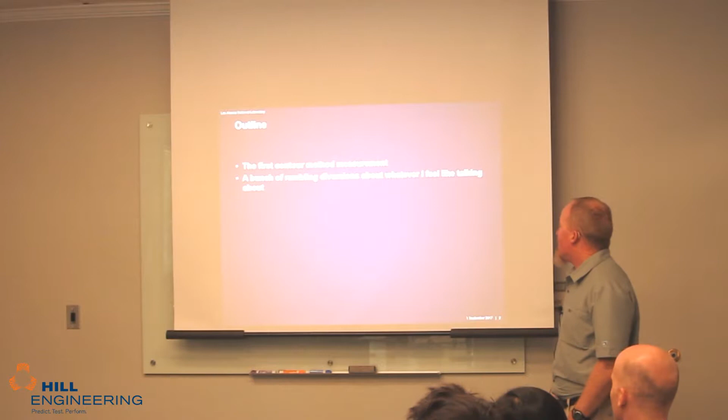When I talked to Adrian about what to talk about here, we both had the same idea to talk about the history of the contour method. So that's kind of what I'm going to do. And you see the title there, the first and nearly last contour method measurement. So really it almost didn't happen, and I'll explain to you why. And I'm going to use this opportunity to tell some parts of the story I've never told before. I figure you guys are an audience that might appreciate it. So even some of the stuff even Mike hasn't heard before. Hopefully it's entertaining. My outline, I'm going to talk about the first contour measurement, and I'm going to do rambling diversions on whatever I feel like. I figure you guys are a captive audience. So I got a few things I'll talk about.

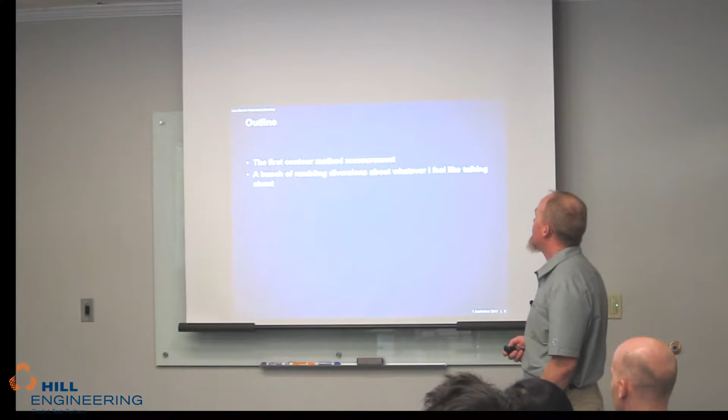First, the backstory. I got my PhD in ME from Berkeley in '94. And I did do my dissertation on residual stress measurement. Worked with Iain Finnie, who was my advisor, and Weili Cheng. You guys have probably seen Cheng and Finnie papers if you read that stuff. Weili was, I think, a postdoc for a while, then a researcher. Very brilliant guy, but very hard to get anything out of. I had a hard time learning the slitting method when I first learned it from Weili.

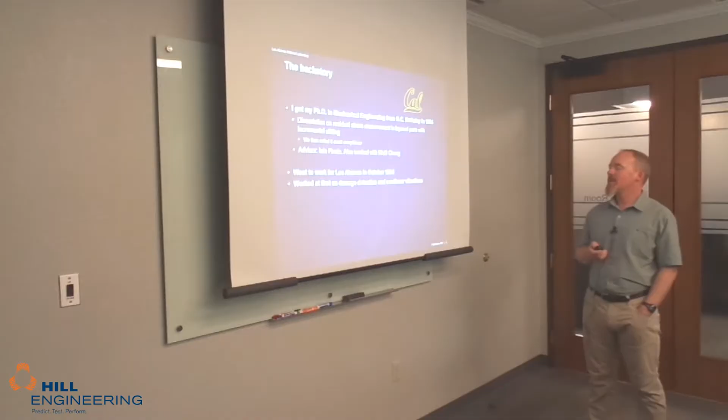Went to work for Los Alamos in '94, and the first year or more I worked mostly on damage detection with vibrations, looking for cracks in parts and things like that. Nonlinear vibrations mostly, mostly that was what I was working on. I got back to residual stress a little bit in '95. We had a CRADA at the lab - Cooperative Research and Development Agreement - with General Motors. And they were worried about distortions in their gears, case-hardened gears.

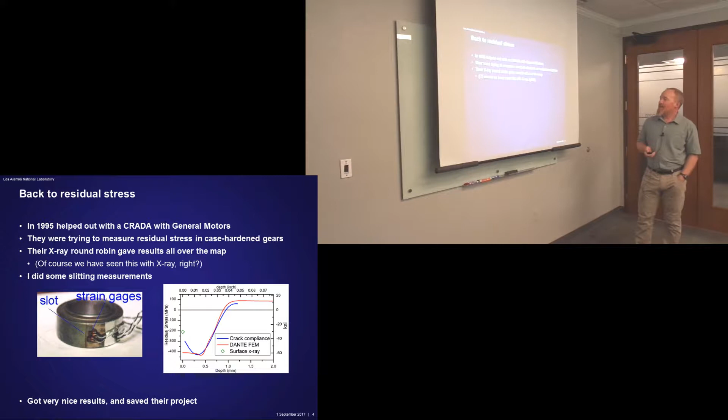And they were trying to measure that residual stress. They had a bunch of guys doing X-ray. And they took the parts, sent them around to a bunch of X-ray labs around the country, and got results all over the map. Now, Mike's not going to be surprised, you guys probably aren't either - we've seen that kind of stuff before with X-ray diffraction. They were quite worried, so they asked if I could measure the stress in this thing. Somebody remembered the talk I had given when I interviewed for the job.

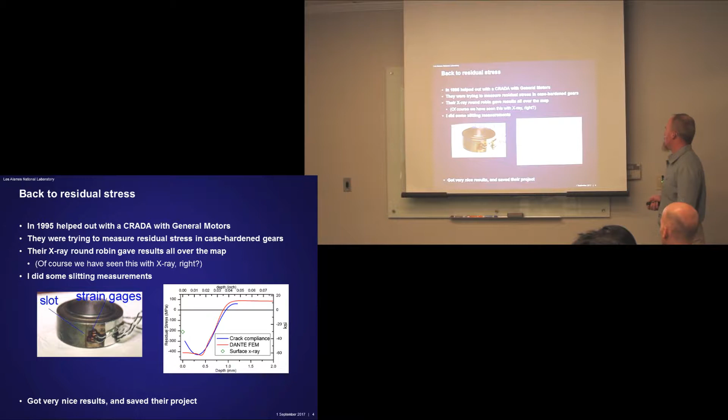So this is the gear blank. Put on some strain gauges. Did EDM slitting from the outside in through the case-hardened layer. And these are the results we got. The blue curve was the residual stress from that slitting measurement, compared with some FEM and a surface X-ray measurement. Got very nice results, and it really saved them on this project. They were really having a hard time getting believable results.

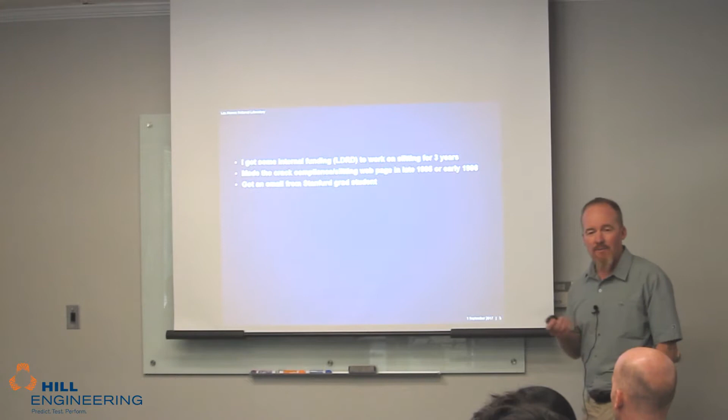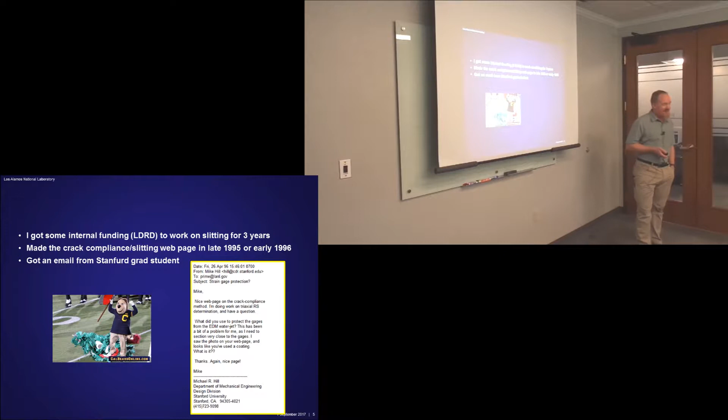And I got an email around then from a grad student from Stanford. I think I've got a picture of the email. How did that get in there? That's Oski stomping that pickle or whatever that Stanford mascot is. This is the email from Mike I got in April of '96. He had seen the web page and asked a question about waterproof coating on the strain gauges. That's how I first met Mike.

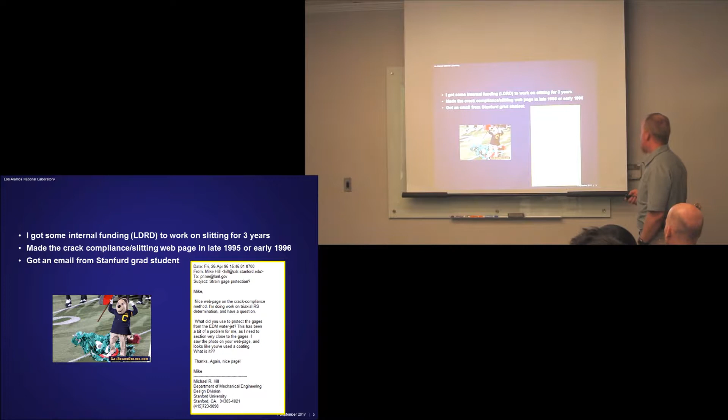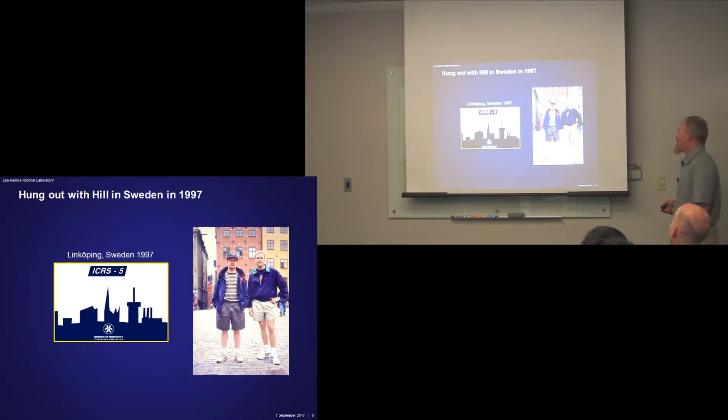I hung out with Mike in Sweden in 1997. The International Conference on Residual Stresses was in Linköping, Sweden in '97. And we roomed together and hung out in Stockholm. There's a picture - nice shorts, Mike. Yeah, had a real good time. And if you ever get the chance, these are great conferences. The International Residual Stress Conferences, I think they're fantastic. All kinds of people working on residual stress, doing great work.

As part of the LDRD, I did a literature review on the slitting method. I looked up all the references I could find, and as part of that, I found this conference paper from a guy working on railroads. You can see the title there—they did saw cuts and measured displacement on railroad rails.

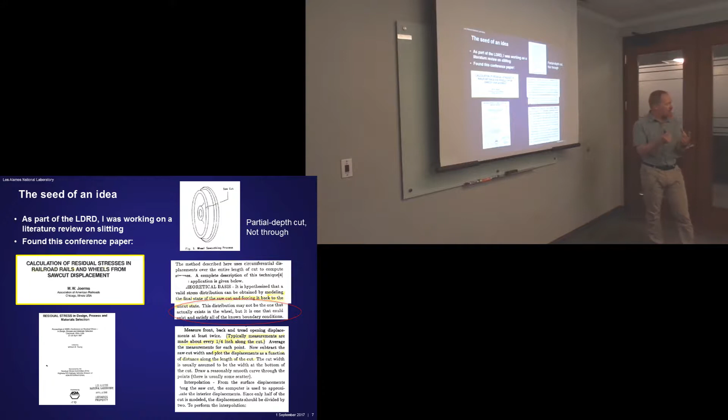Here's the wheel—actually the measurement was on a wheel. He did a saw cut from the outside radius in, so that's the edge of the saw cut. He made marks on the inner and outer, front surface and back surface of the wheel, measured how far apart they were, cut partway through, and measured how far they moved. Then he took those readings, interpolated them a bit, did a finite element model, and forced it back flat. He says it might be right, but he's not sure if that's the correct answer.

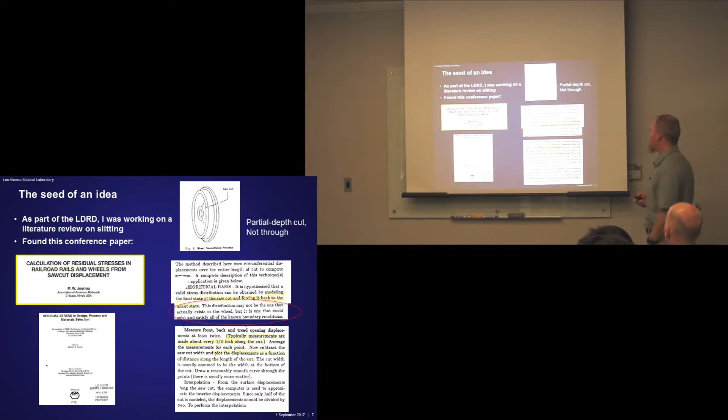I referenced this article in my Slitting Literature Review—it was a LANL report from '97, published a couple years later in Applied Mechanics Reviews. I didn't think much about it after reading that paper.

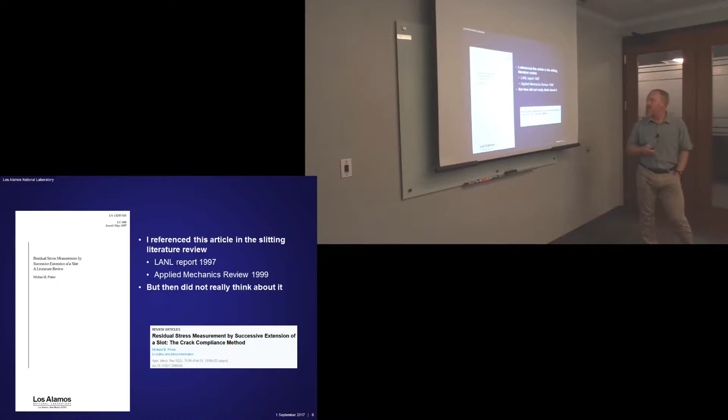I was writing a talk for a conference on the slitting method, and we often talk about how we get the compliances, the coefficients—we use Bueckner's principle. I took this picture from my advisor's course notes.

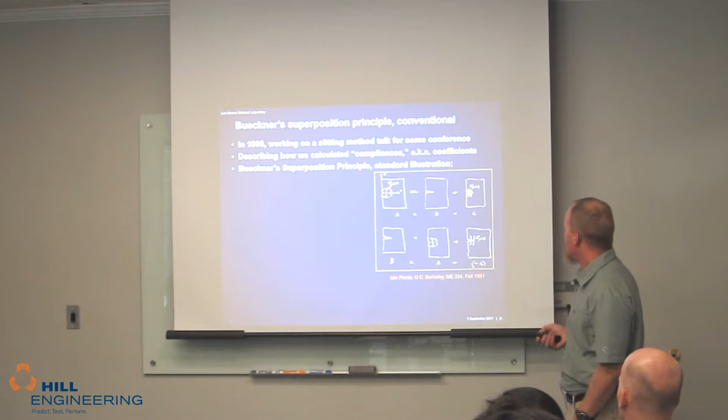This is standard Bueckner's principle. A is a part with residual stress in it, stresses you don't know. If you cut a slot or crack partway in, the stresses redistribute and it deforms. If you take the original stresses on that cut face and apply them to a cracked part, you add those two stress states together and get back the original stress state. That's the basics of Bueckner's principle.

For doing coefficients, like for the slitting method, what you want is B—you want to know how much it deforms when you put in a slot. So the answer is it's A minus C. You take a model with the crack, apply those original stresses to the cut face, and measure how much it deforms. The deformations in A are 0, so those don't matter. That's how you get that deformation.

As an aside, this was an important early problem for fracture mechanics. They wanted to know the stress state around a crack tip. This was in the late 50s, before FEM was capable of doing this kind of calculation, so they were trying analytic methods to solve it.

The question is, as you increment a slit, the stresses redistribute as you go, and each increment you're not relaxing the original stresses—you're relaxing some kind of changed stress. It's conceptually hard to figure out how to do that. This method tells you that all you need to know is the original stresses. You apply the original ones, not redistributed stresses, to calculate that deformation. Not obvious—to me it wasn't obvious, not intuitive. But it was a big deal for fracture mechanics.

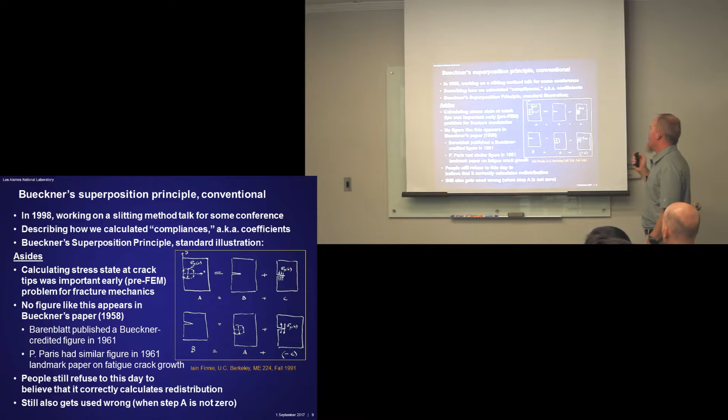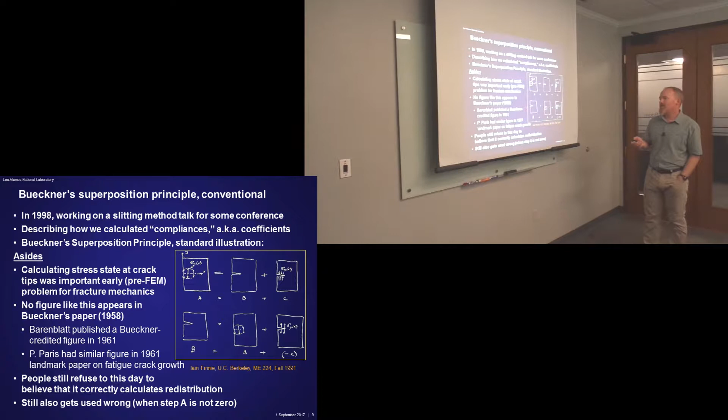I've often referenced Bueckner's paper where he proved this, and over the years I've had quite a few emails and calls from grad students around the world upset because there's no figure like this in that paper—and there isn't. It's mostly written text. The first figure like this appeared in a paper in '61 from Barenblatt, where he talked about fracture mechanics solutions and credited Bueckner for having proved it. That's actually how my advisor, who kind of invented the crack compliance method, found this—through that Barenblatt paper.

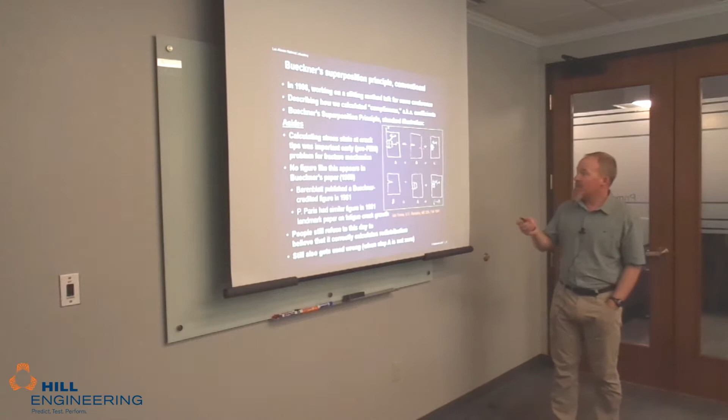As another aside, there's a very similar figure in Paul Paris's paper on fatigue crack growth—Paris's law, dA/dN equals C delta K to the n, a very famous paper. He's got a figure like this he used to calculate delta K for fracture mechanics. If you don't know the story of that paper, I won't spend too much time, but it was published in the engineering alumni newsletter for University of Washington because nobody would publish it, and it was a really quite brilliant piece of work.

People still to this day refuse to believe that Bueckner's principle works correctly, that you get redistributed stresses that calculate that effect correctly. We see papers in the literature every couple of years where somebody says it doesn't work, and it's just because they don't understand. It does get used wrong sometimes as well.

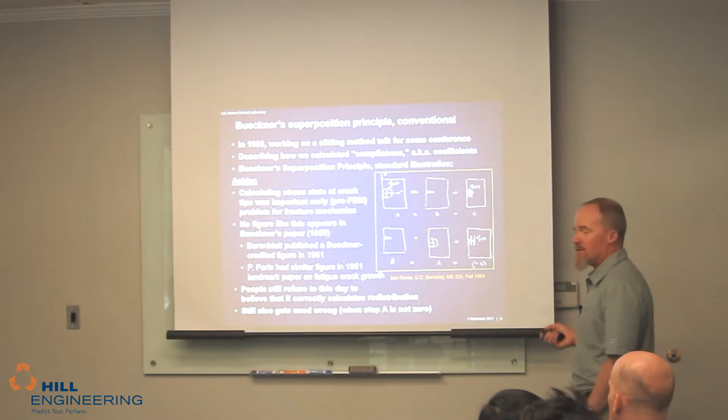I've seen people use this for hole drilling and slitting to calculate yielding effects, to look at plasticity, where they'll do this kind of calculation to calculate yielding at the crack tip. For something like yielding, you can't ignore the stresses here. The deformations here are 0, so you can ignore it for that purpose. The K1, the stress intensity factor, is 0 because there's no crack there, but the von Mises stress in this stress state is not 0. So if you use this to calculate a yielding effect, you're missing part of the stresses. People do that as well—so you have to understand what this principle can do and what it can't.

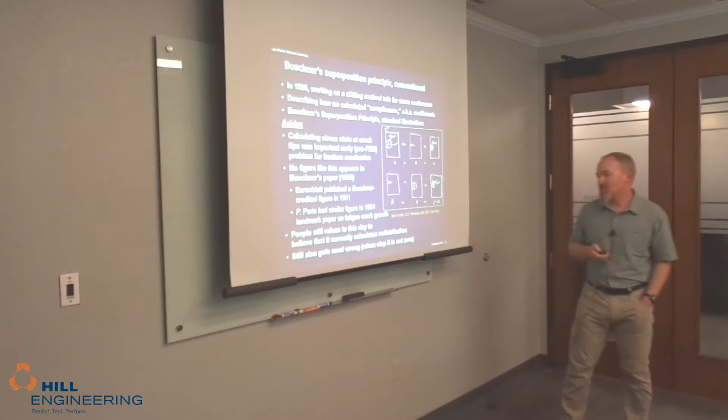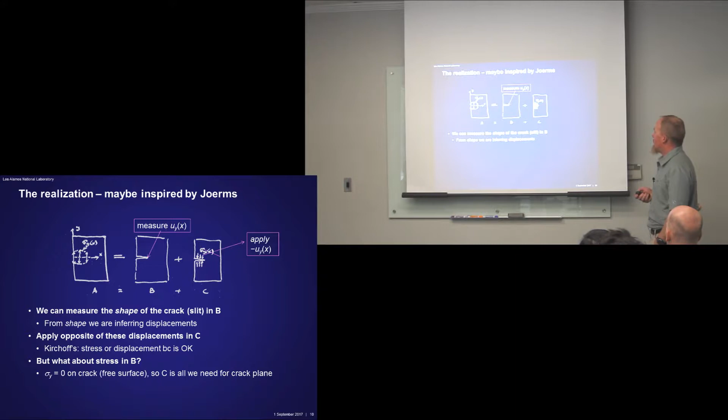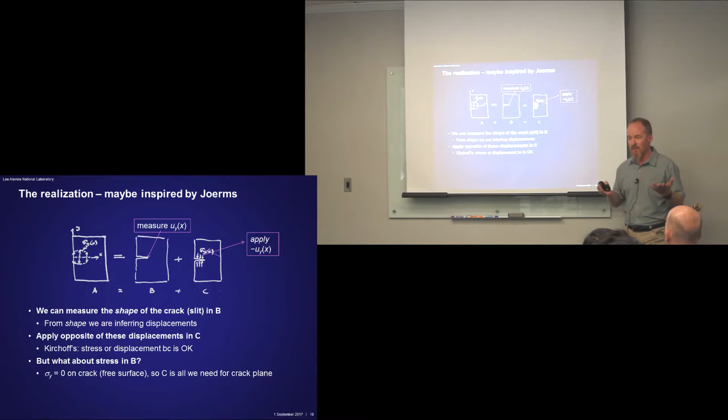This is when I had the idea to do something different, based on that first line of the superposition principle, where you're superimposing stresses. I was thinking about measuring the shape on that cut face, and could we apply a displacement instead of a stress, forcing it back flat displacement-wise, to get back the stresses? There's no reason that shouldn't work, it's a Kirchhoff boundary value problem, you can swap out stresses for displacements as a boundary condition. It should work totally correctly. I realized right away if you did that, you could measure displacements all along that cut face and not make a 2D assumption, but get a 2D stress field in a 3D part.

So that's kind of where the idea came from, actually looking at this figure for a slitting paper. What about the stresses in B? There's 0 on the cut face for that normal stress. So this alone will give you that stress on the cut face, which is why it should work.

I was pretty skeptical that this idea would work. A measurement on the cut surface would be really a fundamental difference for standard experimental mechanics. Almost everything we do, you take a reference measurement, a zero. You measure what something is before you deform it, then do your deformation and measure the difference to get a displacement. We have no reference there, right? That cut surface is not there beforehand. We're just going to measure a shape and infer displacements.

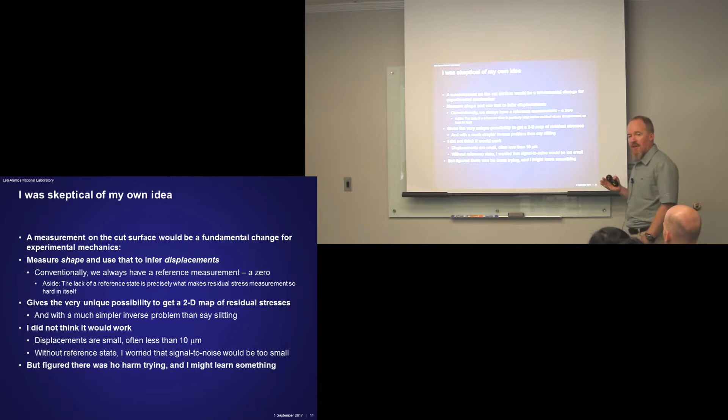If you do that, it can give you that 2D stress map, so I knew it could be quite powerful. And it's a much simpler inverse solution than we use for slitting, so you can kind of double up on benefits if it worked. The displacements are often small, less than 10 microns, and we have no reference state, so I was quite worried that signal to noise would be too small, and we'd never see those displacements. But I figured there was no harm in trying, and I might learn something, so I thought I'd give it a try.

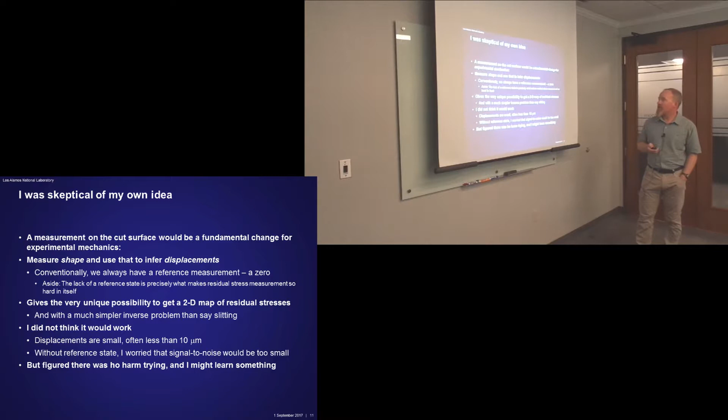So the first question was how to measure that shape. I spent two months on this, a side project of a side project, so it wasn't the main part of my time. I spent a couple months trying to figure out how I could get an instrument inside a slot and measure that shape. I went all over the lab, a big place, Los Alamos, asked people to get anything that can get inside a slot and measure that displacement. Guys talking about miniature lasers and all kinds of stuff. Never found anything that worked.

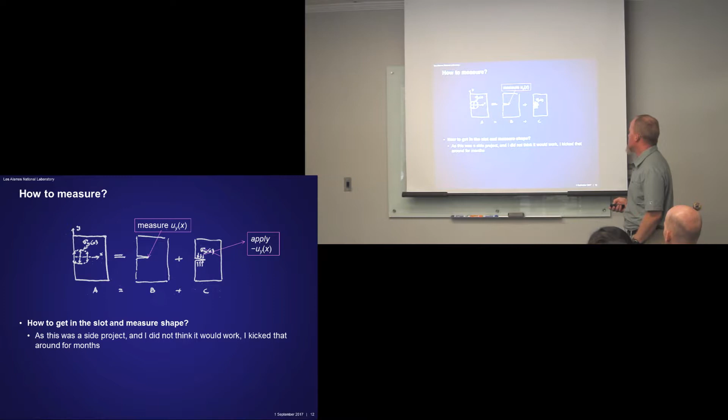And finally, after a couple months, I finally figured out, why don't I just cut it all the way in half? Took me a couple months to get there.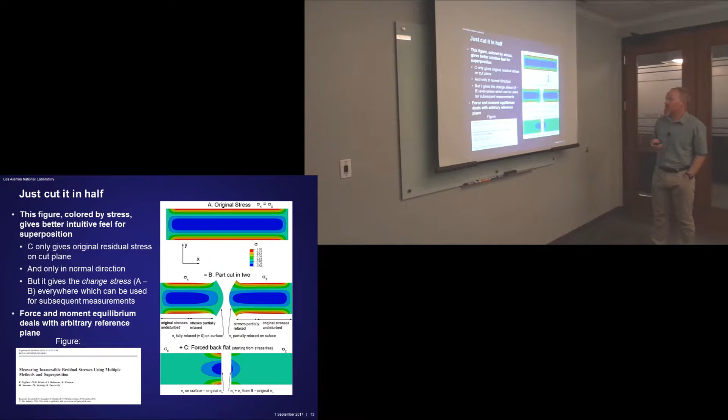All right, so just cut it in half. I had a specimen readily available - we had been making these plastically bent beams to create a known stress specimen for the slitting method, and had published that. Here's the slitting test, we cut EDM, same thing you guys do. There's the strain gauge, this is after the cut. There was a strain gauge on the top surface as well, and we had published all that. The black line is the prediction from the bend test.

Red line is the slitting result. We did neutron diffraction and X-ray diffraction along the surface, which is noisy because this thing had pretty big grains in it, but they all match. So a very well characterized specimen.

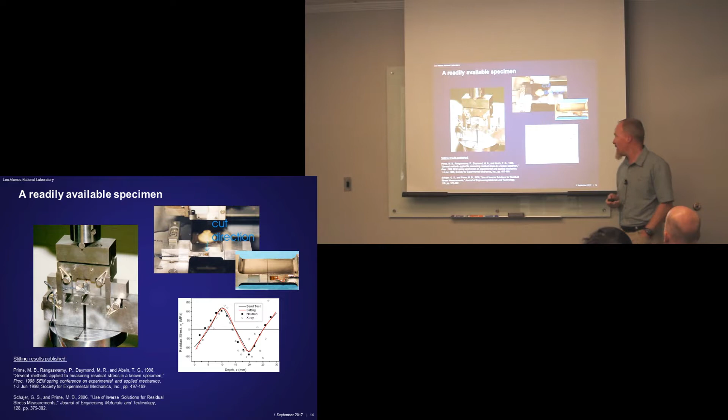We know what the stress is. It wasn't cut all the way in half for slitting, since we usually stop before you get to that back strain gauge. So what I did was I took the thing and actually just snapped it in half that last little bit. Probably not the best way to do it, but if you're going to do it...

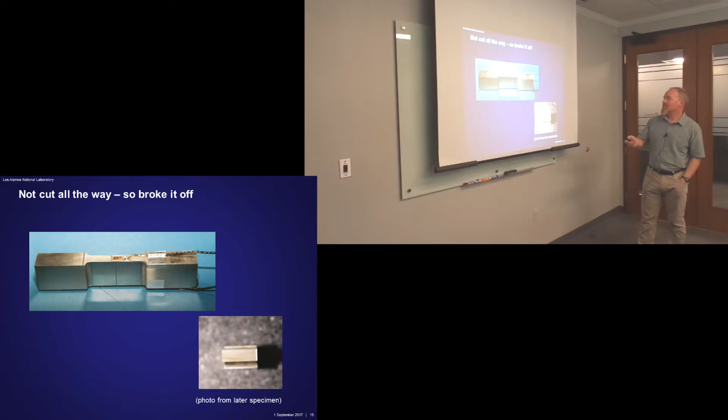That's actually not the surface from the original specimen, I grabbed another picture here. So I had to measure that surface height, and I didn't know how to do that either, how to get a surface height map. I asked around the lab, and somebody said, well, I've got a profilometer, one of these things for measuring surface roughness, where you've got a stylus with a fairly sharp tip that you drag along the surface. But the guy said it also did absolute measurements, it didn't filter out the long range thing.

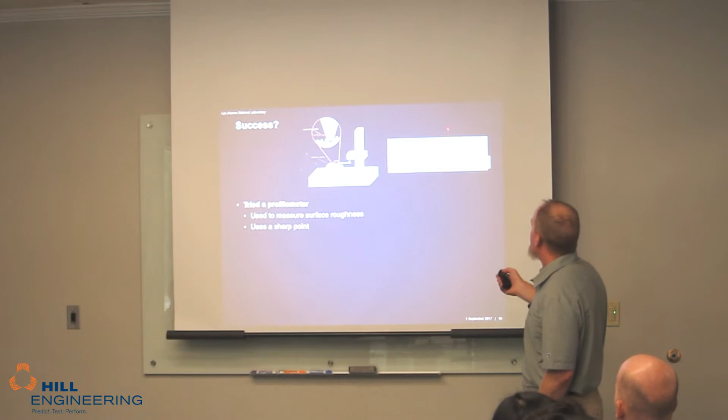So I tried that, grabbed half of the specimen, measured along the surface, and I got this result. This is a strip chart, I don't know if you guys have ever seen this kind of data. It's got a little ink pen on the instrument that actually draws this on the chart, and that's your data. There's no digital, no analog conversion, nothing. I just get data on a strip chart.

And I was thrilled, though. If you look at this, you can see all the noise from the surface roughness, but you see the zigzag, up, down, up, which looks like that bent beam stress profile. I was absolutely ecstatic that this was going to work. I was sure the answer was going to be right. By the way, the range on this is half of a thousandth, so about 12 microns. So it's a pretty small signal, but it seems to be there. I was absolutely thrilled.

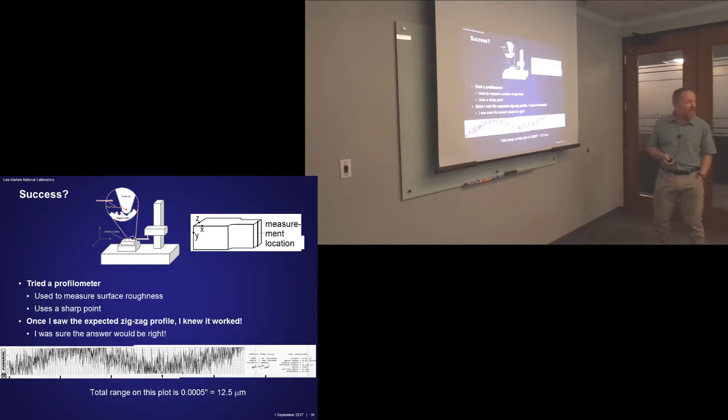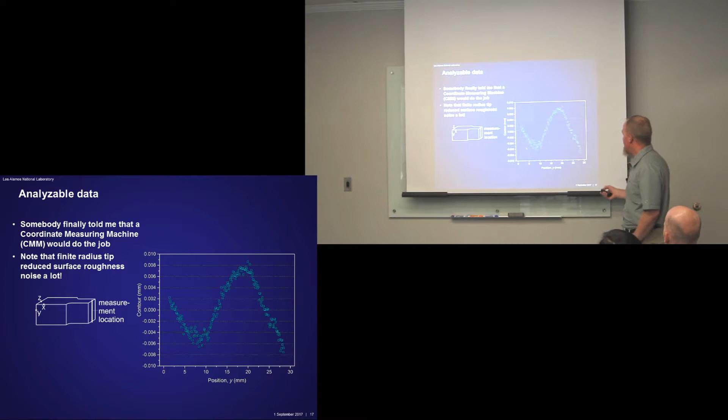And then somebody told me you could measure this on a CMM, we have those in our machine shops. I went back and measured it on a CMM, got the same basic profile with less noise in it. I calculated the stresses the standard way, built an FE model, a 2D model, applied that, forced it back flat. The results are here in pink. The correct answer I showed you before is here in this dashed cyan. So we're too big by about 60%, a pretty big factor.

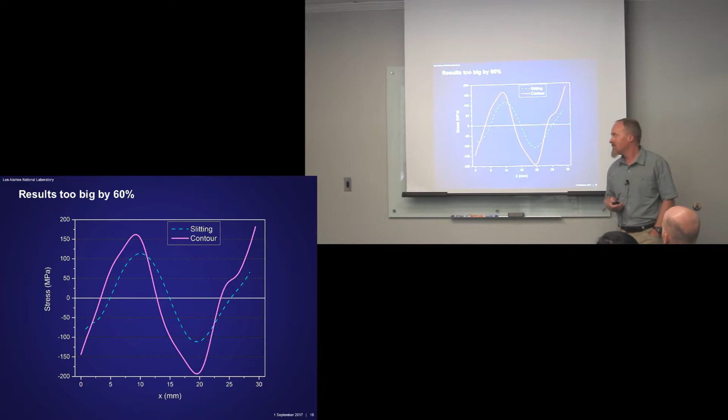And I spent, again, this was still a side project, I spent a good month trying to figure out why I was off by such a big factor. Did I do the calculations wrong? Is something wrong somewhere? You guys know what it was? Why it was wrong? I know Mike knows, and Adrian I think does too. You guys should know this.

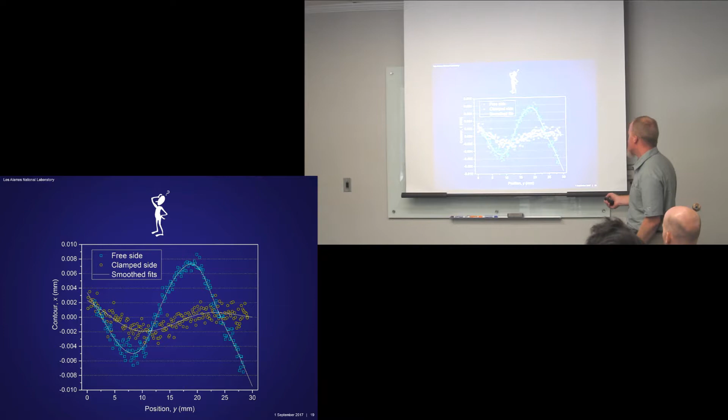So finally I went and grabbed the second half of the beam and brought it to the CMM shop, and I got this result here. Not very much displacement, not much shape. Once I averaged the two sides, I got the cyan curve, which is pretty close to the results we expected. And of course we figured out, I had a grad student back then, and though we didn't publish this for a long time, right away we did this calculation and figured out how if you unclamped on one side, how much the part moved and how much that would mess up the contour. So it made sense, we understood it.

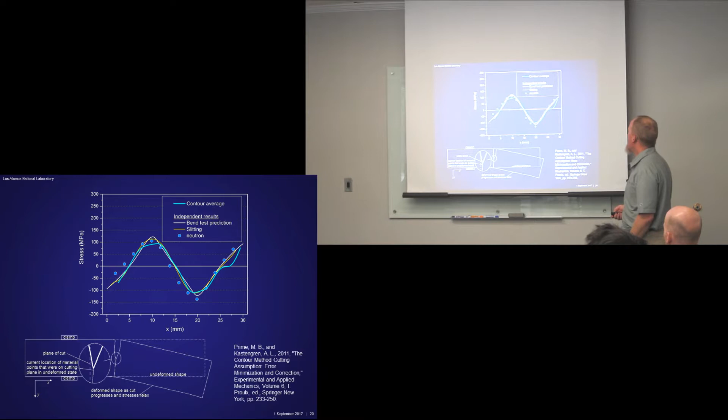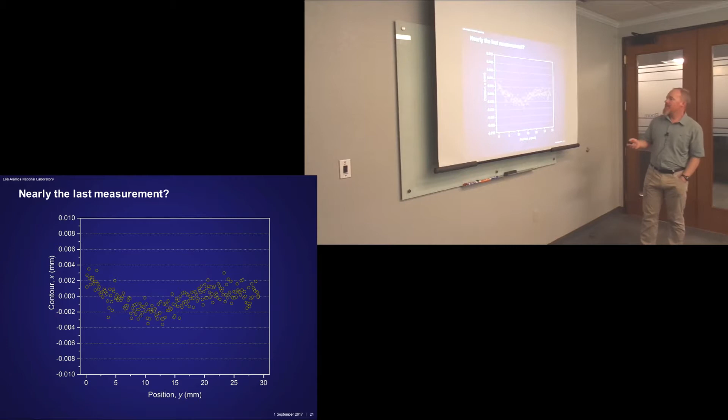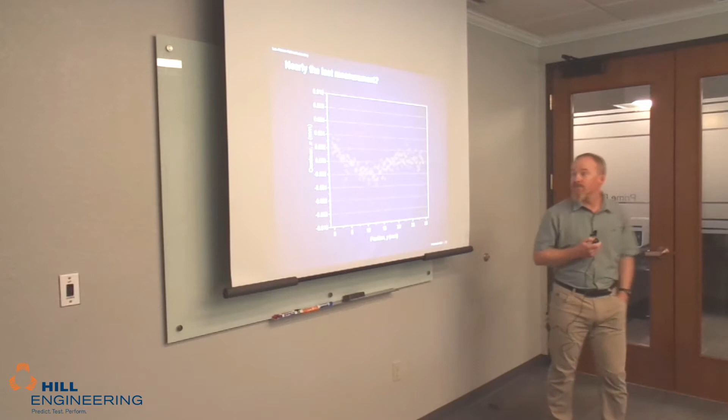The part where I said this was nearly the last measurement of the contour method: if I had grabbed this half instead of the other half, this would have been my data. That range is about 4 microns, and the shape is not right. Because of my lack of confidence this was going to work, I probably would have given up. So I'm pretty glad I grabbed the other half. Kind of dumb luck.

The first real contour measurements were then done in 1999. It was an identical bent beam specimen, I had more than one of these things around, so I cut it more carefully this time, clamped it on both sides, and analyzed all this data myself. It was published in the first contour method paper, which I don't think appeared until 2001.

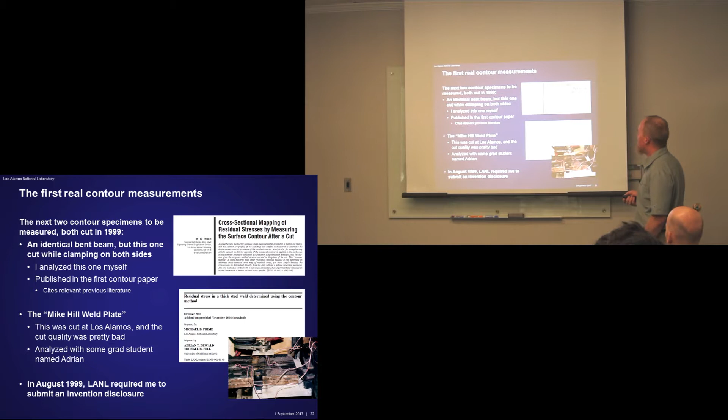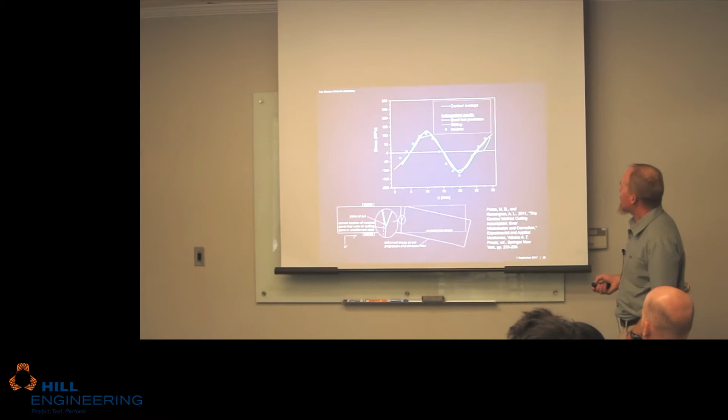The other measurement was done in 1999, the Mike Hill weld plates, what I always called it, which is shown here. Mike must have sent it to me. We would have been talking, once I had this result, it's kind of when I called Mike, I think, and told him. We were working on the slitting method, doing some other stuff, and I told him about this method, and I had this great idea, and I thought it works.

His initial comment was, yeah, that's great, but I'm trying to do this with a slitting method, and how do we do this. It took me a little while to get him excited, not too long, but a little bit.

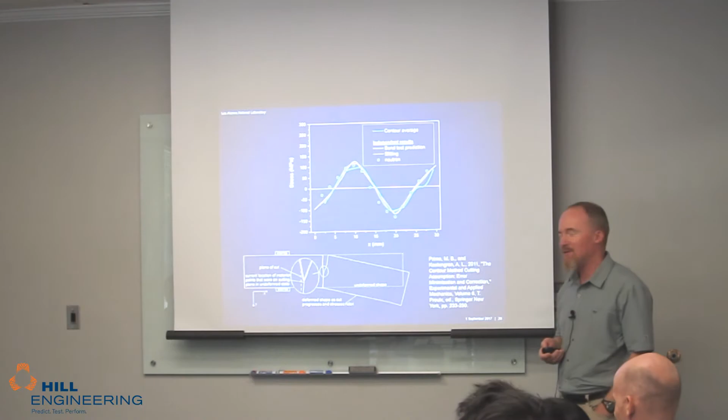So he sent me this weld plate, and I cut it, and I must have done the CMM scan and sent you guys the data. The cut was bad. I went to a different EDM shop, and it was kind of a nasty weld, so the cut quality was terrible. The data is up there on the wall, and you can see all these EDM marks, kind of towards the right side there. It was a terrible cut.

Sent it to Mike. He had some grad student named Adrian analyze the data, and that's in a report. They published the report in 2001, but I think he started sooner than that on working on that data.

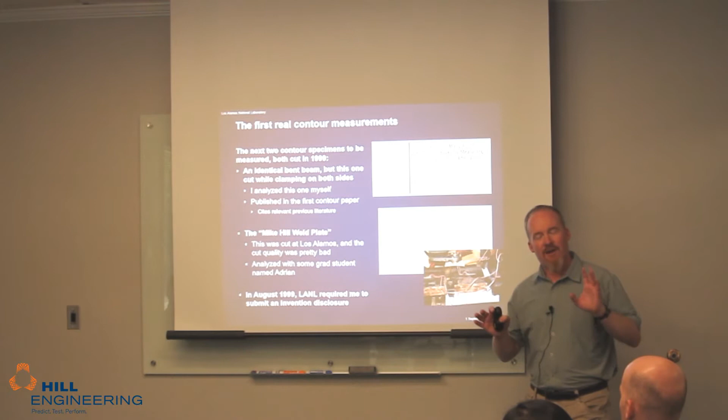In '99, which is before this was published, I had to submit an invention disclosure with LANL. Back then I was submitting an abstract for a conference on the contour method, and all of our abstracts got read by a lawyer for IP issues. I had said, great new method, 2D mapping, first ever, that kind of stuff. So the lawyer says we should patent this. He calls me up on the phone, says we should patent this, I'm not going to let it out of the lab.

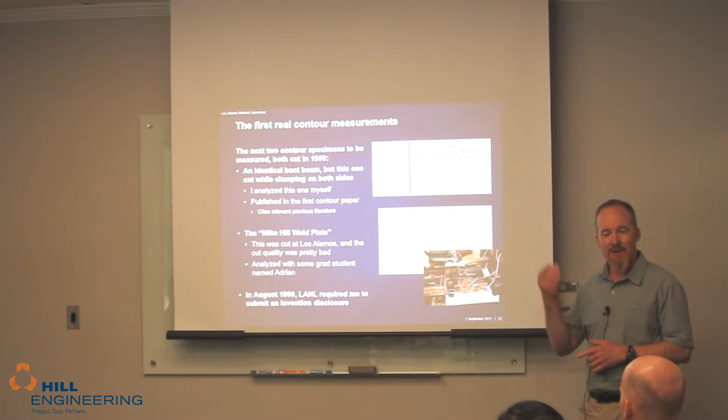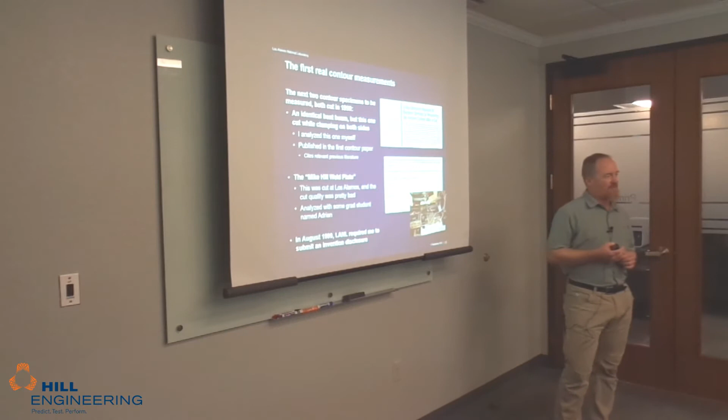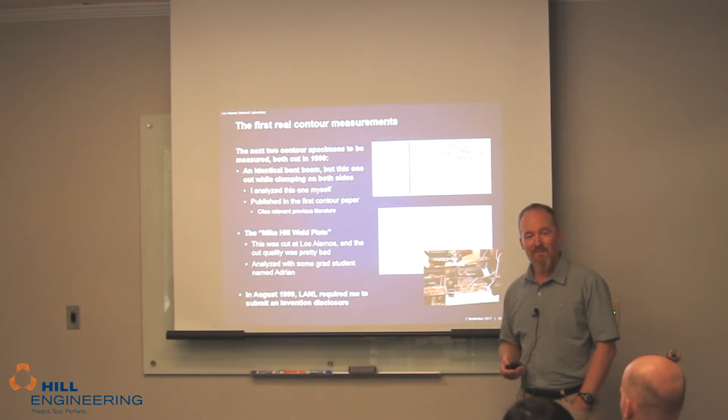I said, I don't think you should. You can't patent the method, that's silly, and nobody would ever pay for this. And he said, I'm not going to let you show this until you submit an invention disclosure, which is an internal form where they decide if they're going to patent it or not. So I filled out this form, describing the method, and it asks, what's the commercial potential? I said, none. How much would people pay for this? I said, zero. The guy calls me back and says, okay, we're going to patent this. I said, why? He said, well, we get judged on this. Our contract with DOE is judged on making some patents, we need about 50 a year and we're short. So you're going to patent it.

Wasted a lot of time with a lawyer trying to explain this, writing it up with a lawyer is pretty painful. Anyways, they eventually did submit the patent. I wasn't too happy about it. You guys proved me wrong, though, on it being worth something.

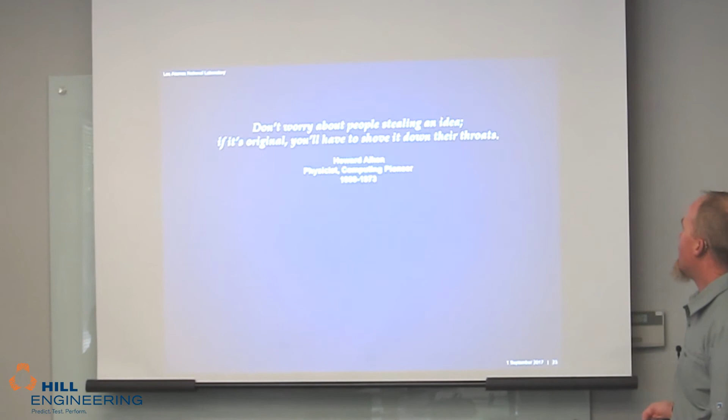Here's a quote from a physicist about if you have a great idea, people won't believe it. So I submitted this for oral presentation at the ICRS 6, which was in Oxford in 2000, and it was rejected for oral presentation.

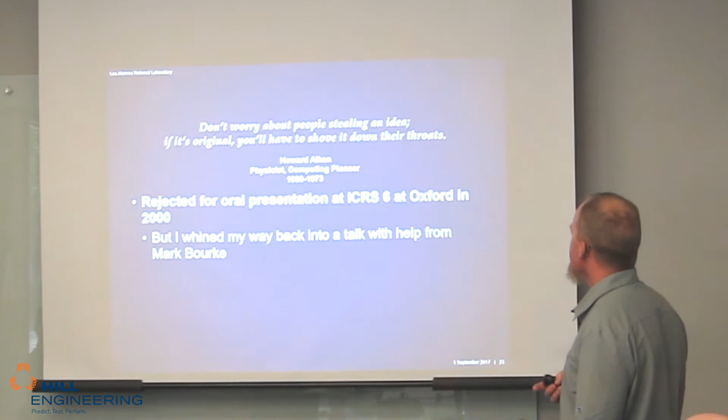I called Mark Bourke, who ran our neutron instrument, and whined to him, and he was British, so he called back to England and whined over there and got me an oral talk after all that.

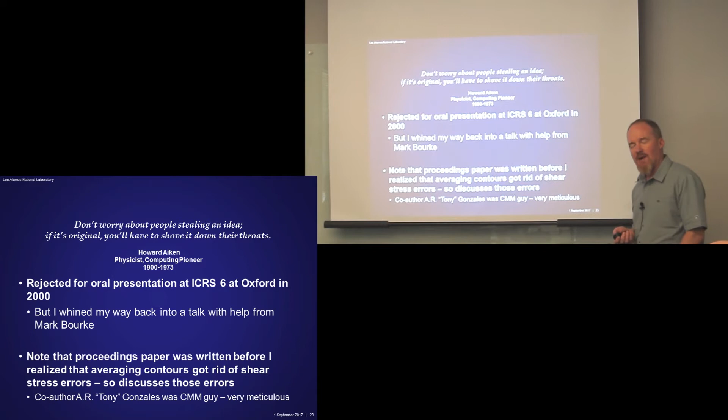The proceedings paper for that, which you can get, it's not on my webpage, but I think it's on ResearchGate now, was written before I figured out that if you average the two contours, you got rid of the shear error. So it actually goes through some estimation of what that error would be, which is kind of pointless because you should just average the two sides.

People asked me, the co-author on that was Tony Gonzales. It was Prime and Gonzales. He was the CMM guy that did the CMM measurements, helped me out quite a bit. He still does them, he's still our lead inspector at the lab. He's also a fantastic black diamond skier.

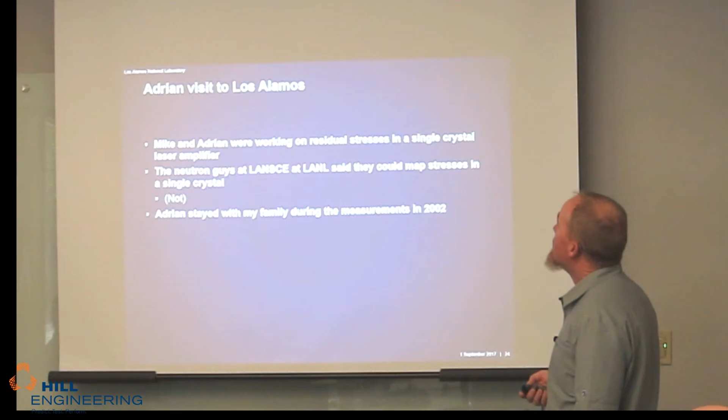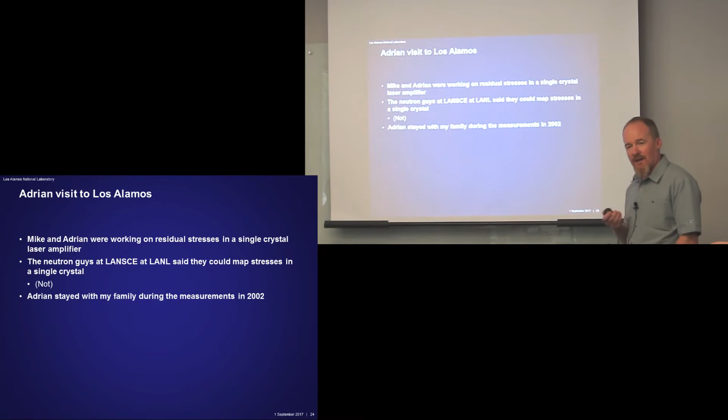Mike and Adrian were working on residual stresses in a single crystal laser amplifier for Livermore, strontium fluoroapatite, a big single crystal. Mike and I must have talked about that, and I talked with the neutron guys, could they do neutron diffraction on this thing? Their answer was, boy, it's a single crystal, we ought to get beautiful sharp peaks and do super precise measurements and be able to map out your stresses.

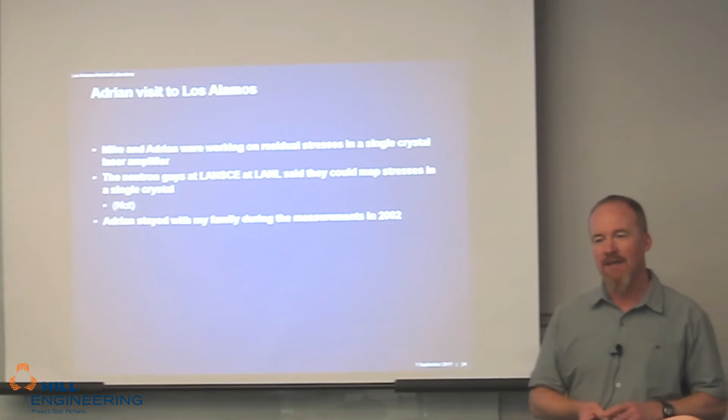So we applied for beam time. Adrian came out and did the measurements. They were totally wrong, the peaks were horrible. Single crystals have a lot of crystal defects in them, and it makes for these very smeared, horrible peaks. We could only get a single stress measurement. I don't know how long you spent actually in the neutron beam taking data, but it was several days, a long time, and it was absolutely useless.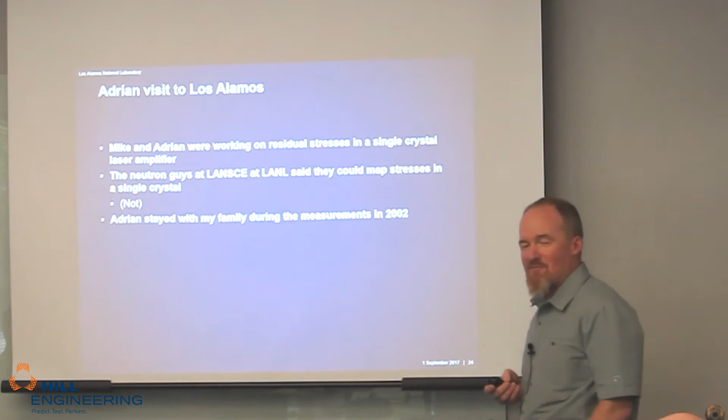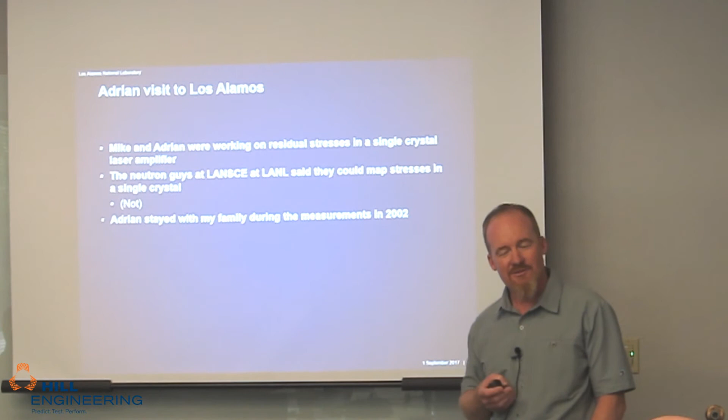Adrian stayed with my family during those measurements in 2002. My daughter was about 4, she's a sophomore at UC San Diego now. Adrian stayed there all week, and my daughter was fascinated with Adrian, he's so conversational at the dinner table, talking all the time. He was this kind of man of mystery, right? He was there at breakfast, he was there at dinner. After 4 or 5 days, Adrian left, and the next day my daughter comes and she's looking around, where's this guy? She asked me, where's the bald boy?

On the day Adrian left, I took him fishing in the Jemez Mountains, right above Los Alamos. He wanted to go fishing, so we took two cars since he was heading straight to the airport from there. I took him to one of my favorite spots, driving his rental sedan out this horrible dirt road full of potholes. Did you get any trouble for the rental car? Yeah, it wasn't the best choice. But we had a good day fishing, though.

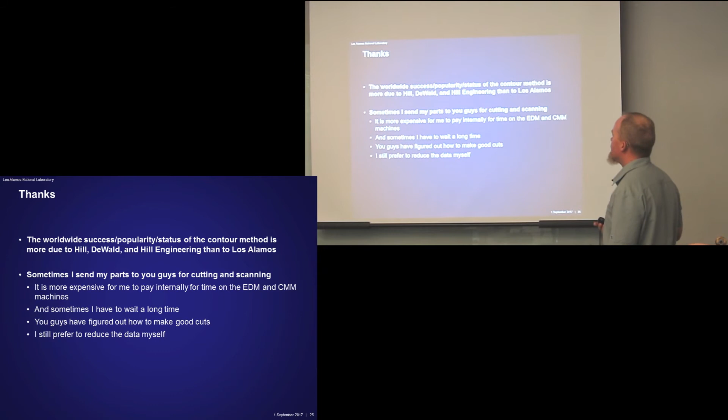So I want to thank you guys. A lot of the success or popularity of the contour method is more due to how much you guys have done than anything I've done. I even sometimes now send my parts to you guys for cutting and scanning. It's kind of funny, but when I do this internally, I have to pay for EDM time, and time on the CMM, and our overhead rates are pretty expensive. It's cheaper for me to send them to you guys, and actually it's faster too—I have to wait my turn on those machines. You guys have figured out how to make good cuts, which is really the key of the contour method, right? Your cut quality is always really good. I still like to reduce the data myself, so I usually get the data back, and I'm glad Adrian still lets me do that.

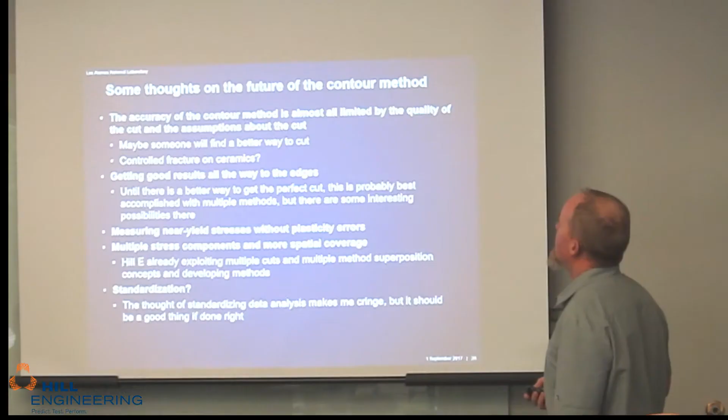While I'm here, some thoughts on the future of the contour method, since you guys do so much. The accuracy of the contour method, I think, is almost all limited by the quality of the cut and cutting assumptions—that it's a flat cut or a constant width cut. We were talking about that today. It's hard, especially on a part that changes cross-section. The cut width changes a little bit, and you get effects.

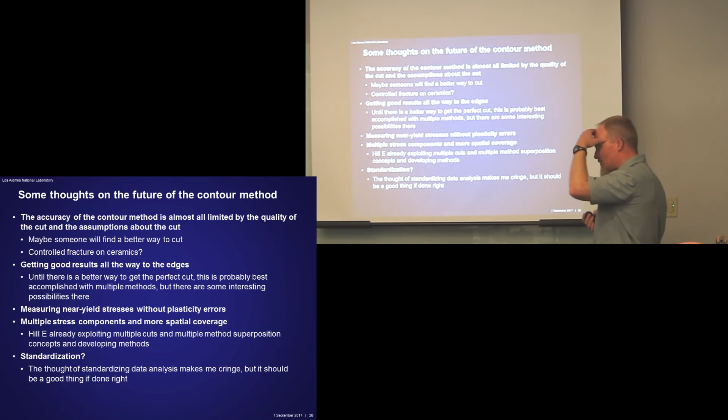I get all these calls or emails from people who tell me they can measure the surface height better than the way I measure it. I say, I don't care—I can measure it better than I need to know it, because these assumptions are what kill us, right? So maybe someday somebody will find a better way to make the cut than EDM. Maybe.

One idea we had talked about—we have that paper, me and Adrian and Mike and Mintran—on the part that fractured. We measured the fracture surface, which is interesting, right? The best quality possible cut would be one with zero cut width and no plastic deformation, and brittle fracture is that. The averaging gets rid of the shape effect, and you potentially get a really nice result. So if you could do a controlled fracture, that would be great.

Ceramics, maybe—I don't think you guys ever measured a ceramic? Tried it on that crystal. Yeah, and some ceramics will cut with EDM, but very few.

Getting good results all the way to the edges—I don't know how much that comes up for you guys. My EDM cuts aren't good all the way to the edge, and sometimes people want that result all the way to the edge. Until you can get a perfect cut, you can approach that with multiple methods. I think there's some interesting possibilities to try and get more data up to the edge if you wanted to do that.

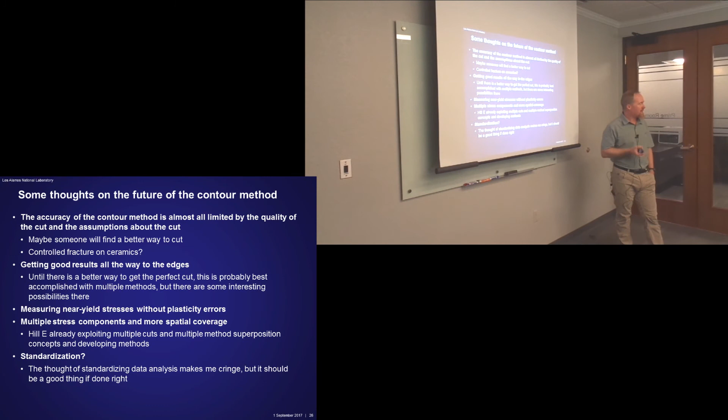The plasticity errors issue is always there, right? Potentially—always a question of whether you're getting yielding as you make that cut. And it's very hard to objectively say whether or not you had that effect. So some way to fix that, make it less, or to know it if you have, is always great. There's probably some ways to do that, but it's not easy.

The multiple stress components thing comes up a fair amount, and you guys are already doing that kind of superposition method where you do multiple methods, right? And that works pretty well.

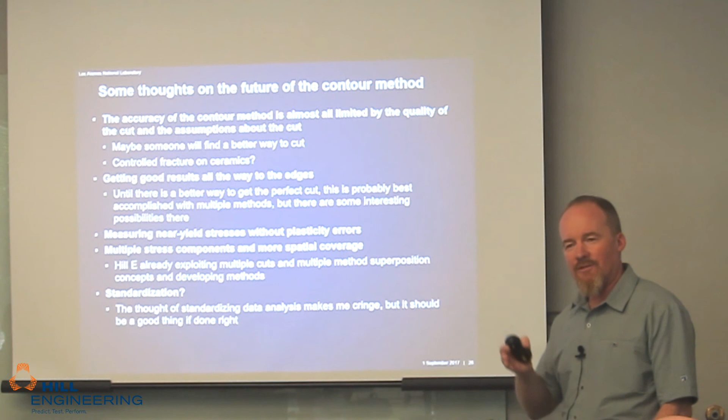Standardization comes up a fair amount, probably more for you guys than for me. People must ask, is this an ASTM standard? The thought of that makes me cringe. In the data analysis, often there's something funny going on—you've got to correct for some artifact. So that one always worries me. I don't want anything to do with making that standard, but maybe it's a good thing in the end, and you guys can figure out a way to do that, or I don't know.